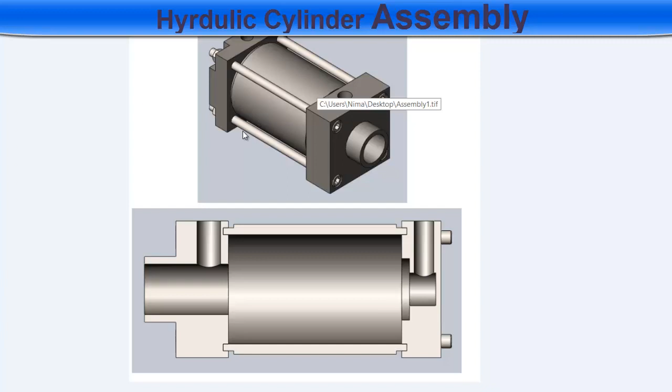In this video, I am going to design this hydraulic cylinder assembly. This is the L cap, this is the R cap, this is the cylinder, and there are 4 nuts and 4 bolts used to assemble it.

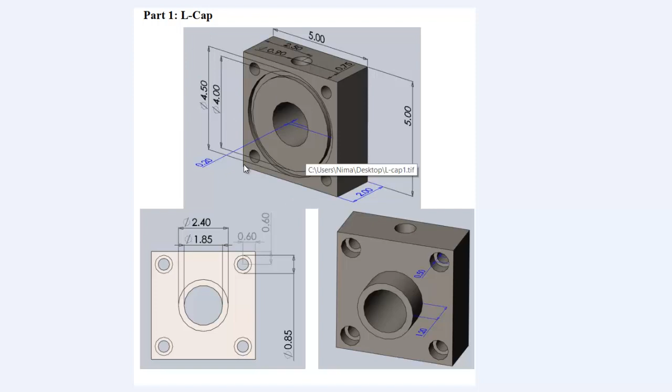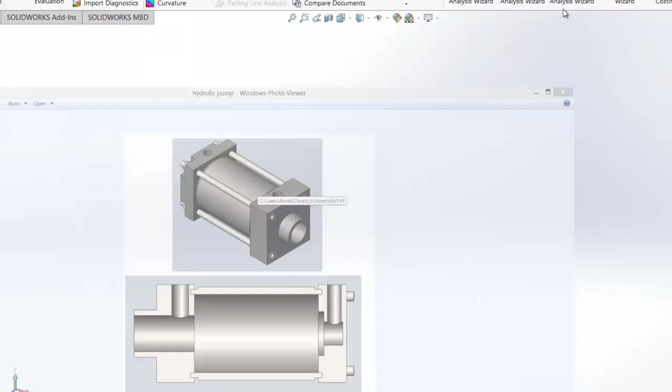The given units are in inches, so we need to verify that our working environment is selected as inches, so IPS, meaning units are in inches. First I am going to select the sketch tab, go to sketch, and open the sketch on the front plane for my base feature.

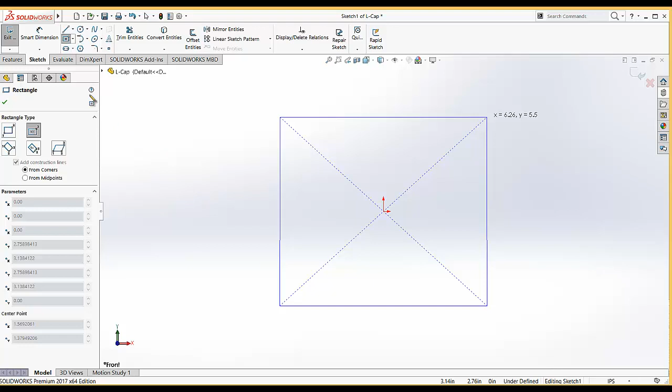I am going to select the rectangle tool, select the center rectangle, put the first point on the origin, drag it, and give the dimensions to this rectangle: 5 and 5. Then I'm going to exit the sketch, click on the feature tab, and extrude it. The depth of extrusion is 2 inches.

After that I am going to click on the sketch tab, start the sketch on this face, the front face of the model. Select this face and go to normal to.

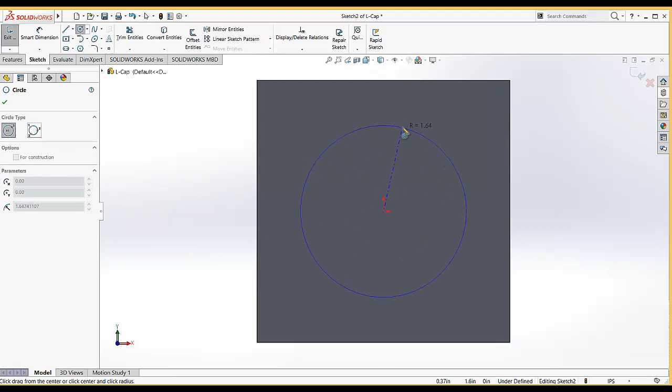Then I'm going to draw 2 circles, first circle and second circle. Make sure they are concentric. If they are not concentric, add a concentric relation and select dimension. The dimension of the bigger circle is 4.5, and the dimension of the smaller circle is 4.

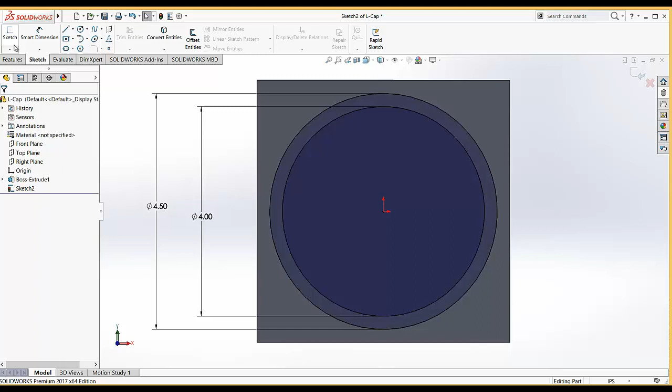The sketch is fully defined, so exit the sketch, go to the feature tab and select cut extrude because we want to make a cut, and go to isometric view. For the depth of this cut, we want a 0.2 inch cut. Click OK, and the cut is made.

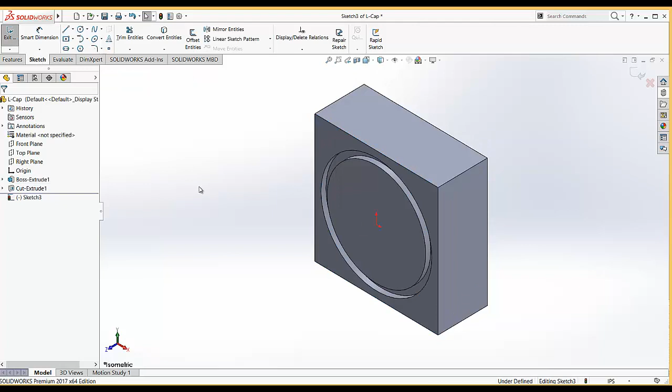Now I'm going to draw four holes in this face. I'm going to select this face, go to sketch and start sketching. Select circle, just draw one circle and then dimension it, and also draw the positioning dimension of this circle.

So I'm going to select this. This is given as 0.6, and from the center point to this line the vertical positioning dimension is 0.6, and the diameter of this circle is given as 0.5.

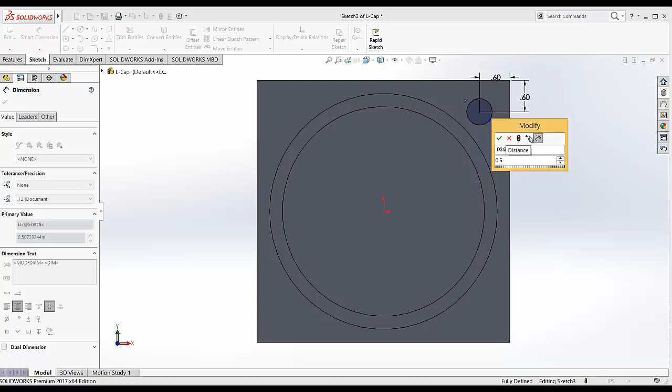Then I am going to draw 2 center lines, starting from here, again a center line starting from this point, 2 center lines starting from the center, one horizontal and one vertical. Now I am going to mirror it.

I'm going to select the entity to mirror, select this circle, and for mirror about I am going to select this reference line. Click OK. Then I am going to select mirror again, and for entities to mirror I am going to select this circle, select this circle.

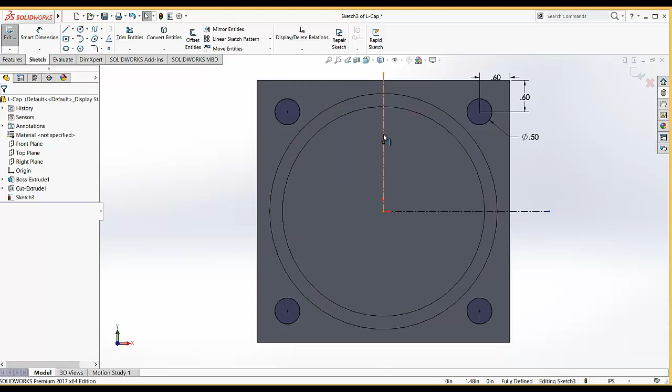When I drew this line, by mistake I did not make it a vertical line, so I added the relation by selecting this line and selecting vertical to add the vertical relation. That was my mistake. So the four circles are drawn. Go to exit sketch, make it isometric.

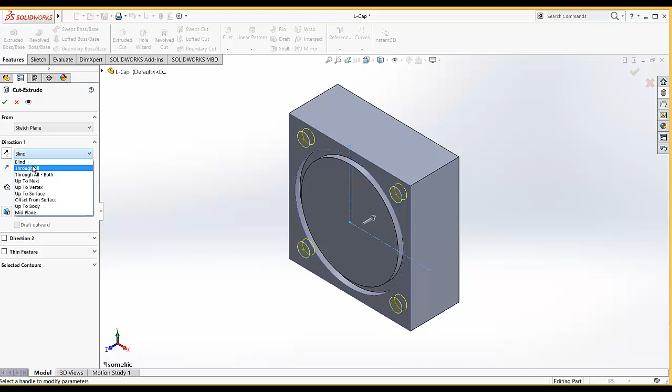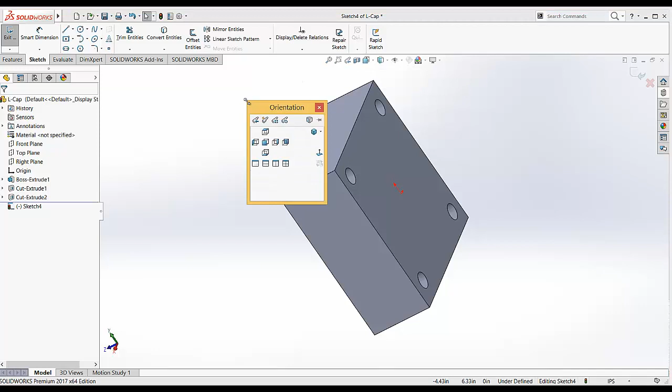Then go to extruded cut and under direction make the cut extrude type through all. Now I'm going to press and hold my middle mouse button and rotate the model because I wanted my sketch on this face. So I rotated the model, go to sketch and click on this face, then make it normal to. We can also select this view orientation by pressing the space button on our keyboard and selecting normal to.

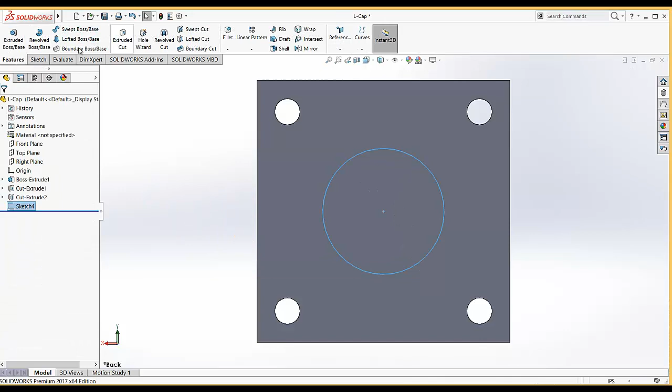Now I'm going to add a circle here and the dimension of this circle is given as 2.4. Then exit the sketch, select extruded boss, and for the extrusion make sure the direction is correct.

We don't want it in that direction, we need it in the reverse direction. So I am going to select this, and under the depth, the length of this extrusion, we need 1.2 inches.

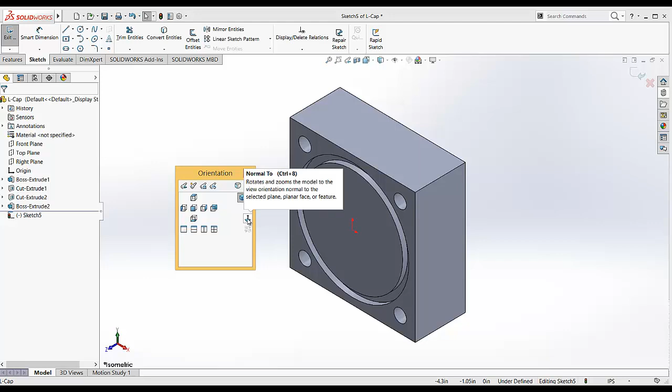Now I am going to select this sketch and again make the sketch on this face. So I am going to select this face, press the space button on your keyboard and click normal to, or you can also do it by going here.

And this is 1.85, we are going to make a cut. Then go to feature, extruded cut, make sure this sketch is selected, and select the type of cut extrude feature as through all. Press the middle mouse button and you can see the hole is done.

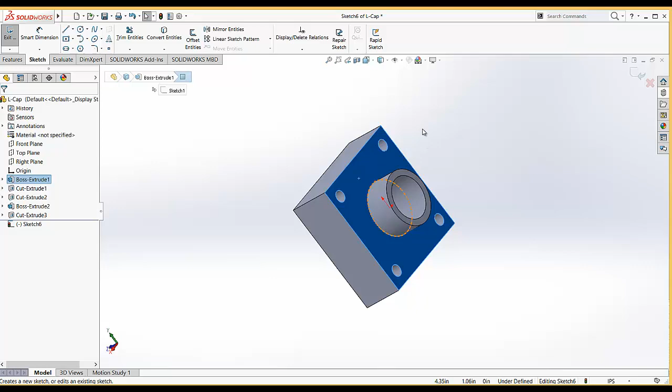Now I am going to press the middle mouse button and open my sketch on this face. Go to this face and click sketch, or you can also click on this face directly. When you click on this face, a window will appear and you select sketch. It will open a sketch on this face, then go to normal to.

I am making this tutorial for beginners, that's why I am explaining everything. If you have good practice with SolidWorks, you basically know a lot of shortcuts and how many ways we can do different things.

Select the circle, and when selected, the cursor converts into a pencil. Near the pencil you will see a small circle, meaning the circle command is activated. Move your cursor onto the center point of a circle, and the center point will automatically activate and show in the sketch. For example, if I move my cursor to this circle, its center point will be activated, and if I go to the edge of the circle, the center point will also activate like that.

I am going to move my cursor onto this circular hole, the center will be activated, and I am going to select this center point for the center of my new circle and place it here. Now the relation is automatically added. This new circle has the same center point as this circle, meaning these two circles are concentric.

I am going to select dimensions, go to sketch, and this dimension is given as 0.85 inch. Same way I needed these circles here and here, so I am going to add 3 circles, or we could mirror this, but I am going to add 3 circles.

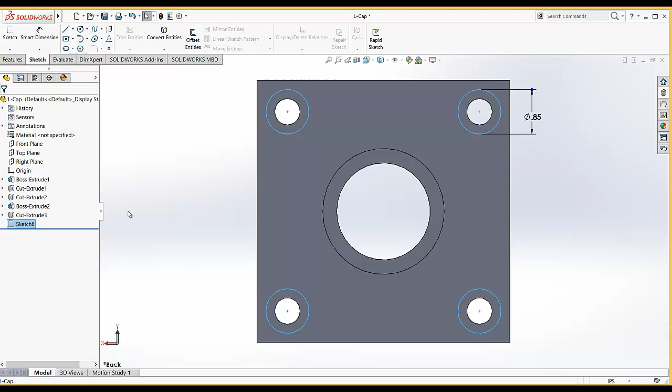So the sketch is fully defined. I am going to exit the sketch. Now I am going to make the cut. I am going to select this sketch, go to feature, extrude cut, and the depth of this cut is 0.5 inch.

Now only one feature is left, which is the cut on this top. So I am going to select sketch, open the sketch on the top face, press the space button on the keyboard, select normal to so the view is normal, and add a circle here. I am going to add the dimensions of this circle; the diameter is given as 0.9.

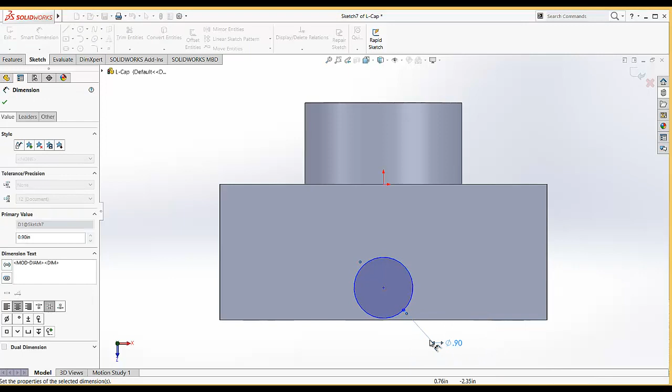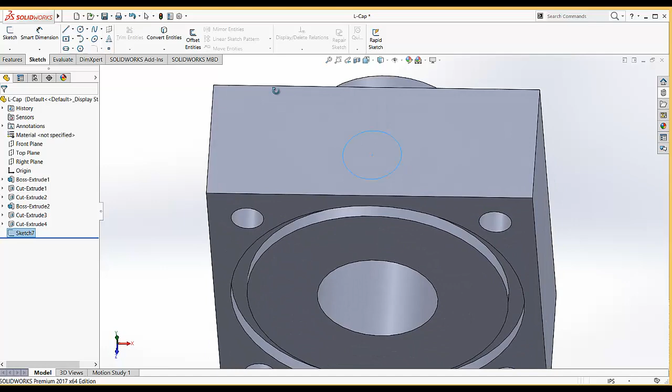For the position dimension, the distance from this point to this edge is 2.5, and the distance from this center to this is given as 0.75. Then exit the sketch, rotate the model, and make the isometric view.

Go to the feature tab and extrude cut. Under Direction 1, under the type of extrusion, we need to choose the end condition. Go to this arrow and open all the types of end conditions available. Our required end condition is up to the surface.

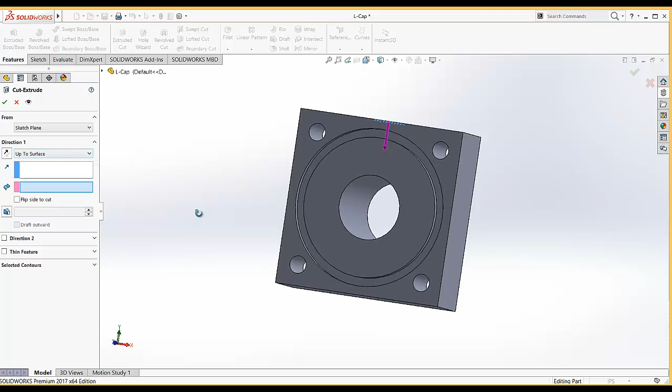To add up to surface, I need to select a surface for reference, so that this cut extrusion will touch that surface, like SolidWorks will measure the length of the cut feature. I am going to select this surface, and SolidWorks calculates that the length or depth of this cut must be from this point to this surface.

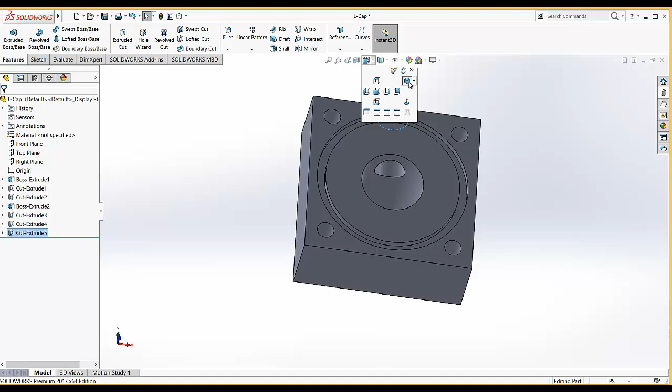If you hold the middle mouse button you can rotate the view, and you can see the cut goes till this surface. So our L cap is completed. I'm going to save it.

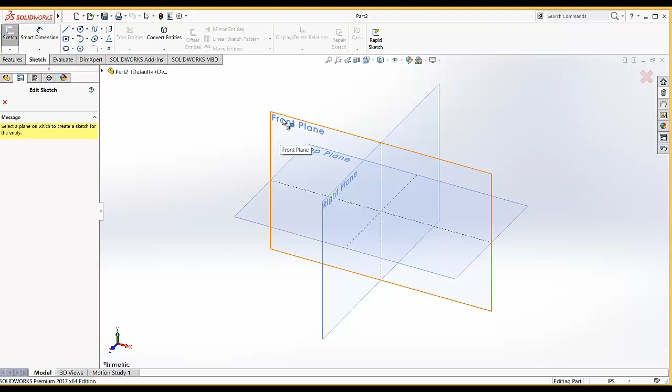Now I am going to start my new part, and draw the left cap. So go to sketch, and I'm going to open the base feature on this front plane. I am going to select the front plane for my base feature, open the sketch on this front plane, select the center rectangle tool, select this first point, and open the sketch.

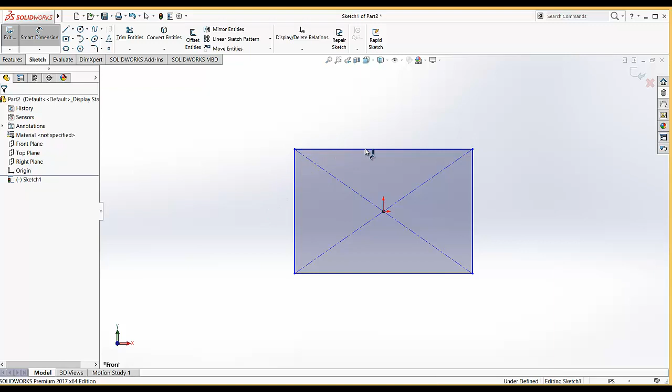Draw the rectangle, and this dimension is also the same - I am going to select 5 and 5. Then exit the sketch the same way and select extrude. This time the extrusion is 1.5, so I added 1.5.

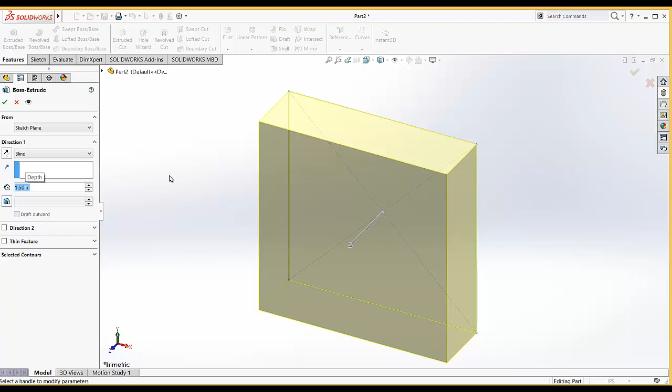Then I'm going to click OK, and click anywhere to deselect the sketch. Now I am going to draw the next feature. Select sketch, and for the plane of the sketch I am going to select this face, this front face, and go to normal view.

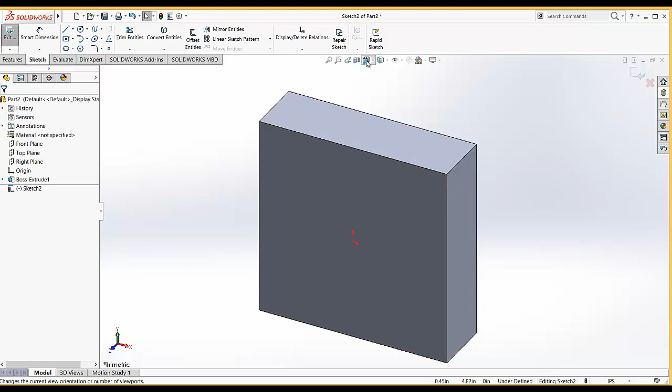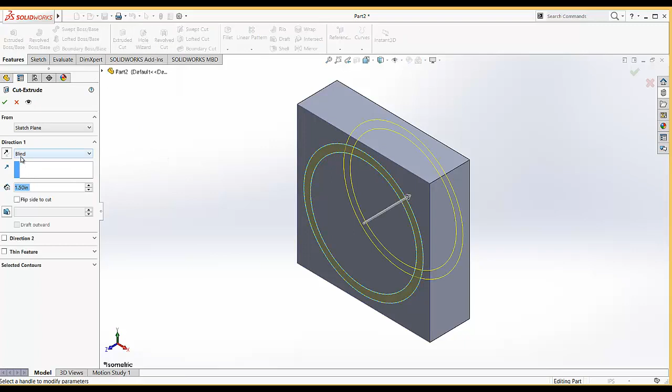Now I am going to draw a circle from here to here, and the diameter of this circle is given as 4.5, and the diameter of this other circle is given as 4. Exit the sketch, go to normal view, then open the extrude cut on this face. For the end condition, select blind, and the depth of this cut is 0.2.

Check OK. Now I am going to open the sketch on this face, press the space button, click normal to, and then select the circle.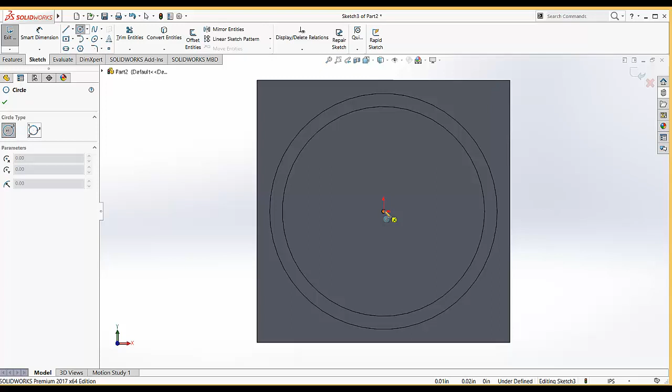Now I am going to add a circle of diameter 2.25 and click exit. Go to feature tab and select extruded cut, and for the depth of this cut, the depth is 0.3.

Click OK, and again I am going to select the sketch, and this time for the plane of my sketch I am going to select this surface, not this one, the inner surface of my design. Open the orientation and go to normal, select the circle tool and draw a circle.

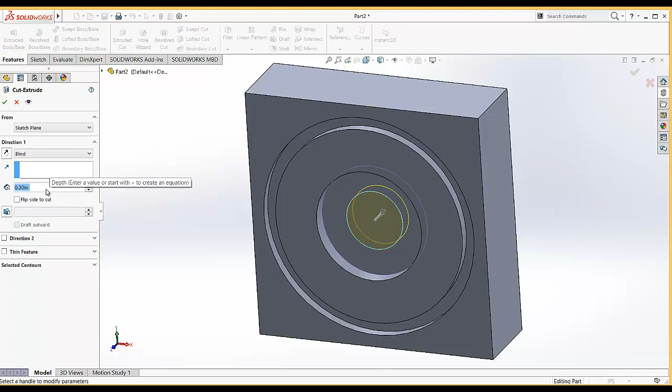The diameter of this circle is 1.2. Feature tab, extruded cut, and the depth of this cut is 1. Click OK.

Now I am going to add a hole on the top of this surface. So I am going to sketch, open the sketch on this surface, go to view orientation and normal to.

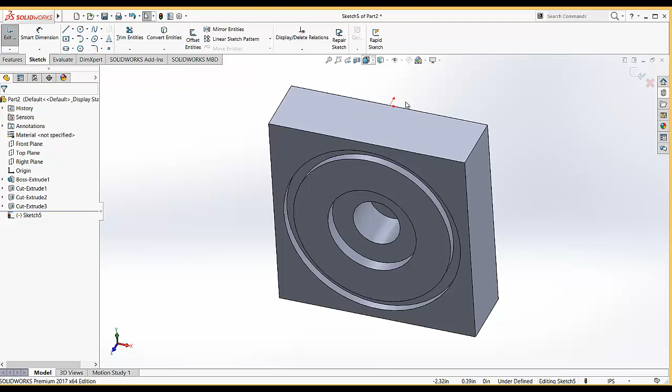I am going to select a circle, draw a circle, and then select the smart dimension tool, select this point and this line. The dimension of this is 2.5, and from this to this is 0.85, and the diameter of this circle is 0.75.

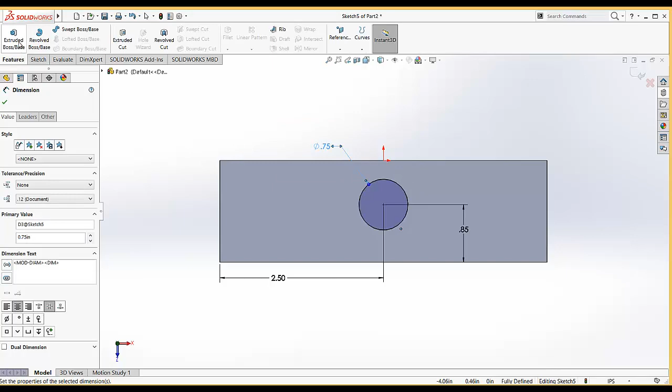Extruded cut. And again, under direction 1, the end condition type, I am going to open the dialog box of the end conditions, and I am going to select up to surface.

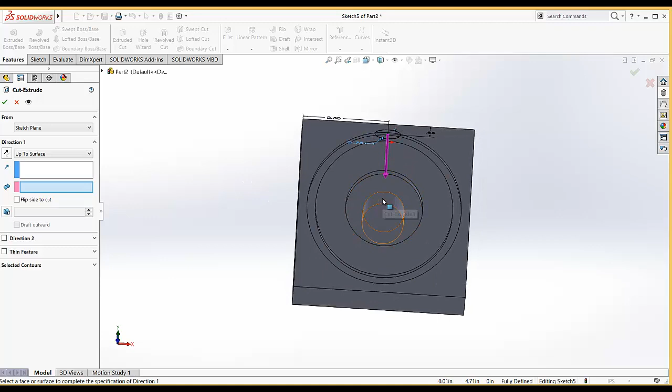This time we wanted our sketch to remove the material till this surface, so I am going to select this surface. If it is in that position, hold your middle mouse button and drag your mouse to rotate it to a suitable position, then select this surface. Now the cut will be till this surface.

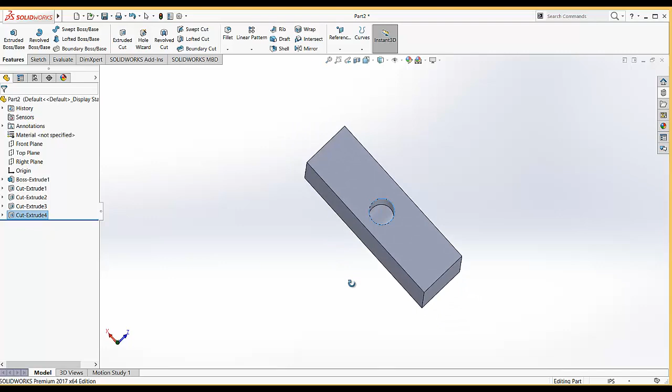Click OK. You can rotate your model and see the cut. Go to isometric. Now I am going to press my middle mouse button and rotate the model to see the back side of this model.

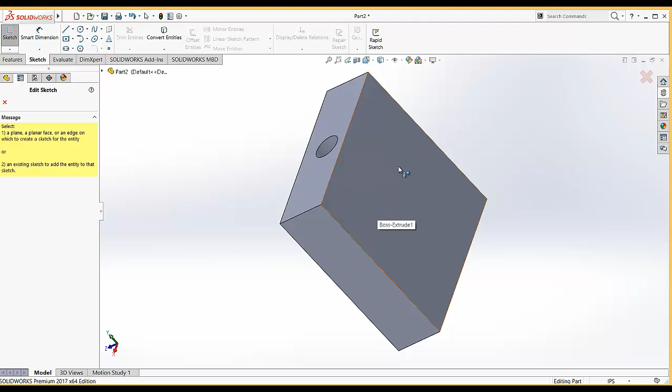So I am going to sketch, and open the sketch on this back side of the model. I am going to click on this surface and normal to. Now I am going to select a line tool.

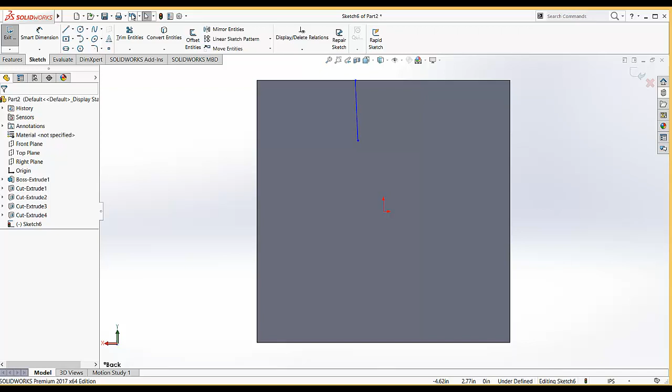I am going to draw a sketch like that. Sorry, I'm going to delete this whole sketch. Again select line, and I'm going to draw a line.

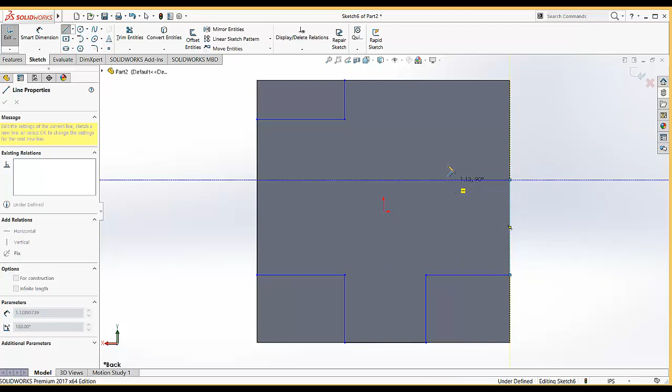So I randomly draw a sketch similar to this, similar to my requirement, like that. I draw a sketch like that, and now I am going to add some dimensions and relations to this sketch to make it similar to this sketch.

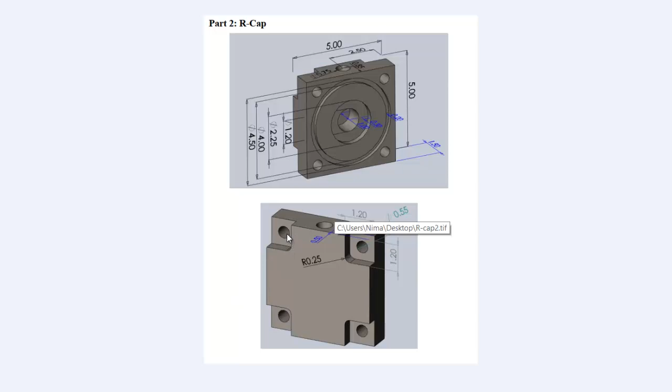To add the dimensions, we can do it either of two ways. Either select a line and another line by pressing control, and SolidWorks under the properties will show all the suitable relationships you can add between these two lines, or you can go to display and select add relation. So under this add relation, I want this point and this point vertical.

These 2 points must be, sorry, horizontal. These 2 points must be facing each other, like they are on a horizontal line. So I am going to click horizontal and press OK, unselect these 2 points, again go to this and add a relation between this point and this point.

Horizontal, click OK. Again go to add relation, and this time select this point and make them vertical. So these 2 points are facing each other and they are on a vertical line. Select this point and make them vertical, like that.

Now I am going to dimension it. So distance from this to this edge is given as 1.2, and distance from this edge to this edge is given as 1.2.

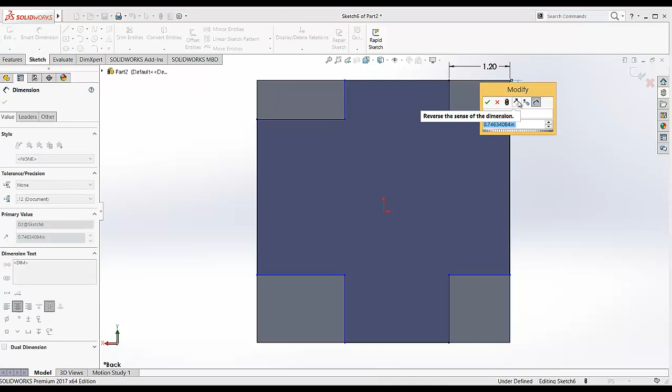And from this to this is 1.2, from this to this is given as, okay, from this to this is given as 1.2, and it's fully defined. By defining these 1 2 3 4 dimensions, it is fully defined.

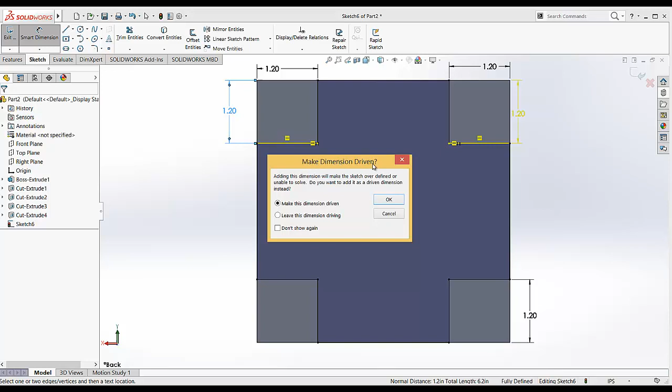If we add more dimensions like this, if we try to add one on this side, it will over define our sketch. This passage tells that to make dimension driven, we are over defining the dimensions, we don't need any more dimensions. So click OK, go to exit this sketch, and now I am going to extrude this sketch.

Middle mouse button and rotate it, and the depth of this extrusion is 0.5. Now I am going to add the fillet.

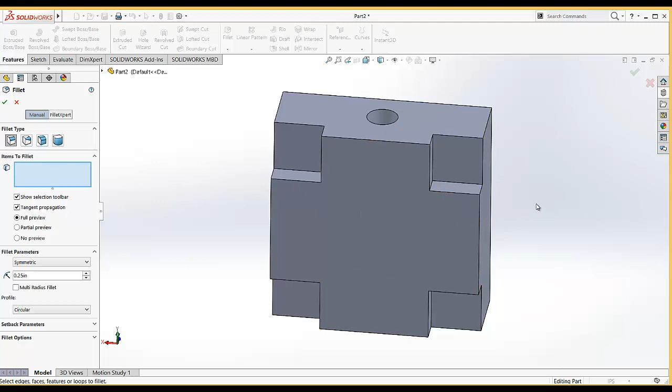So select fillet, and the radius of the fillet is given as 0.25. I am going to select the edges where I wanted to place the fillet. So I am going to rotate the model by pressing the middle mouse button.

I am going to select this edge. If this preview is not selected, make this full preview checked, because it will show you the preview of the fillet.

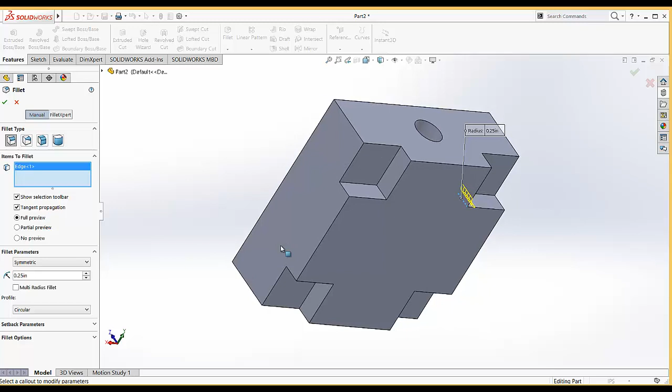So again middle mouse button and rotate to a suitable position and select this one. Again middle mouse button, keep holding it and drag your mouse and select this, and again middle mouse button, drag it to a suitable position, select this and check OK.

So now the holes on this surface are left. I am going to select sketch, start the sketch on this surface, press the space button and normal to, and draw a circle here.

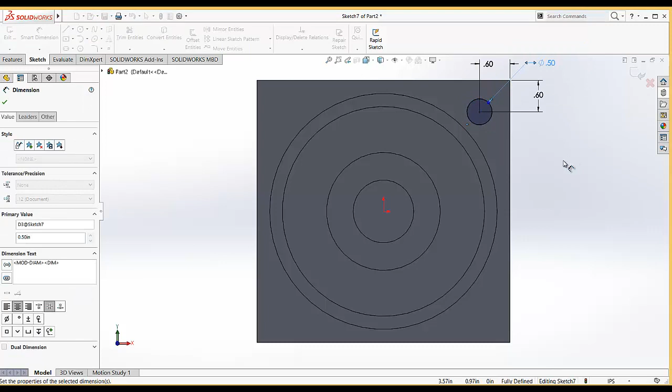From here to here this is given as 0.6, and from here to here is also 0.6, and this is 0.5. Select the center line and draw two center lines starting from the origin, one horizontal and one vertical.

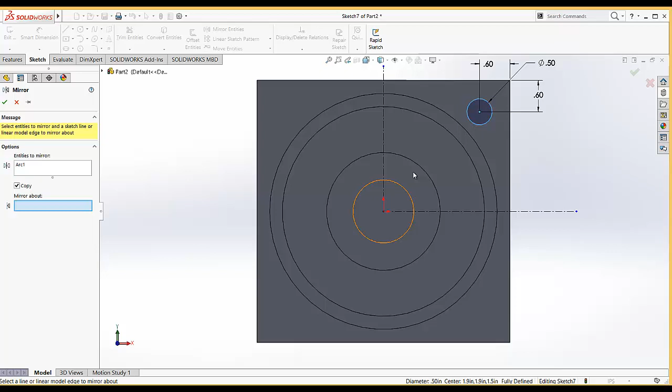Then go to mirror, select this circle, under mirror about select this line. Again under entities to mirror, select this circle, and under mirror about select this line, then click OK.

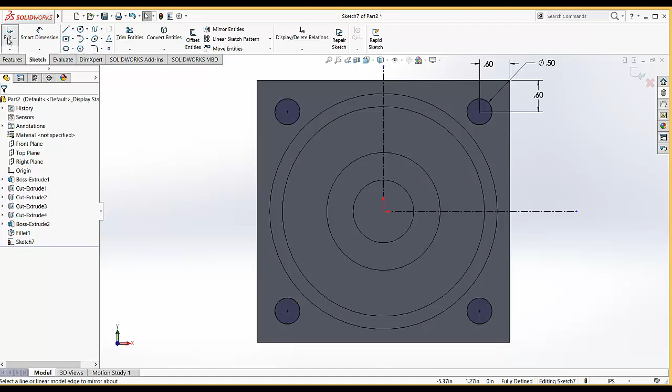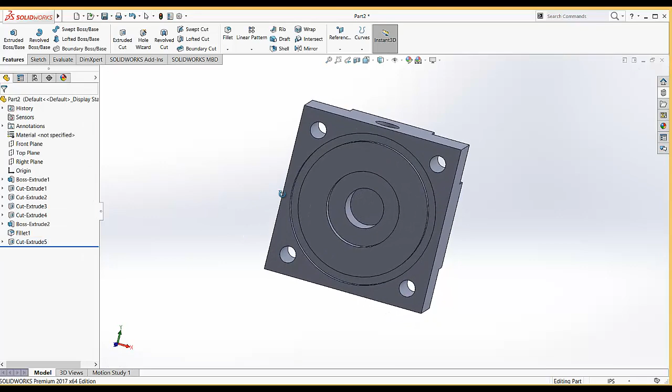Check that the sketch is fully defined, meaning we don't need any dimension, and click exit. Now go to the feature tab and add the cut. Make it under direction 1, and for end condition type, make it through all. Create the model and check. The model is done. Go to save and okay.

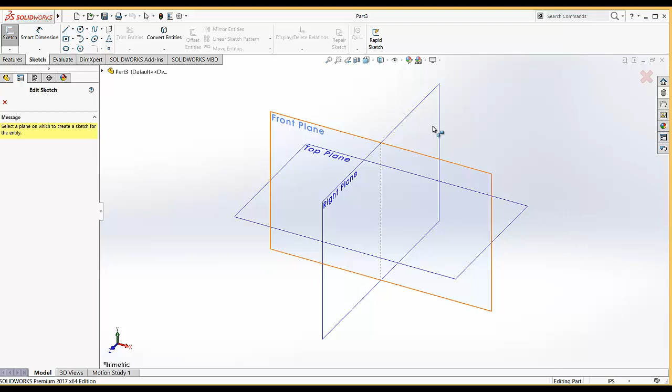Go to new part, units inches are already selected. Go to sketch and select the right plane for our sketch, then go to circle and draw two circles.

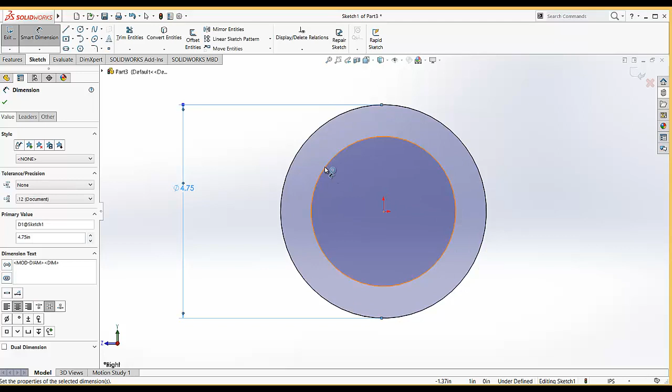The dimension of this circle is 4.75, and the dimension of this circle is 4.

Exit the sketch, go to isometric view, select the feature tab, and select the base boss extrude command. The total depth of this cylinder is 7.

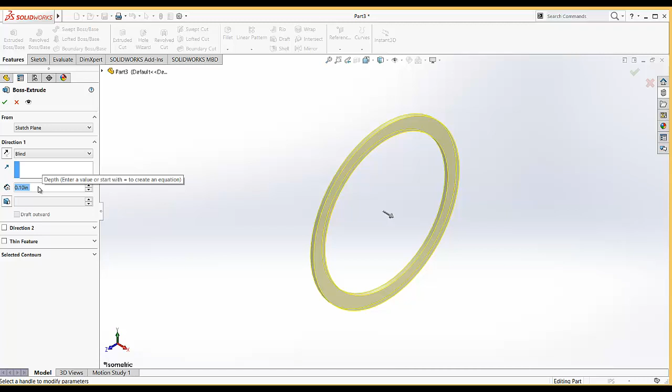Now you see the extrusion is in that direction, so go under direction 1, under end conditions. Now the end condition is blind. Click here and select the mid plane end condition.

By selecting the mid plane end condition, our sketch will be extruded on both sides of the plane. You are able to see this sketch. So by selecting mid plane, our sketch is extruded in that direction, half meaning 3.5 in that direction and half in the opposite direction of our sketch plane. Hope you understand the mid plane end condition.

There is a benefit to selecting this mid plane end condition according to our design. In this design, if we select this mid plane end condition, it will save our time.

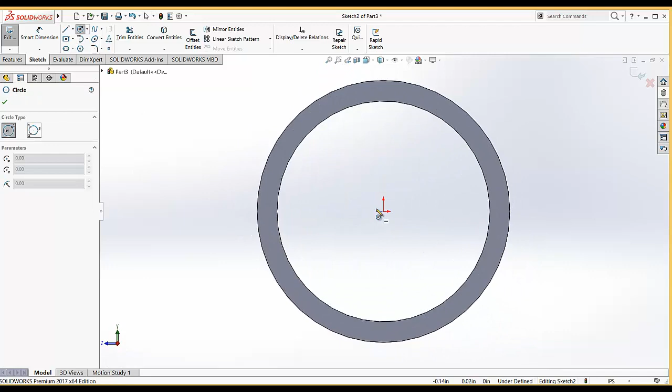You will see it. So I am going to select sketch, start the sketch on this face, and click normal to. Now I am going to add a circle from here to here and click smart dimensions; this dimension is 4.5.

Now we need to add another circle, so I go to circle and add a circle like that and dimension it. This dimension is 4.7. This circle is the same dimensional circle which we already added in our base feature, in our first sketch.

So one way of adding this circle is to select the circle and add it again, but that will take some time. The other method is that I'm going to delete this circle. Go to delete, and the circle is now deleted.

Because we need this edge in our sketch, we can either add it by drawing a circle again and dimensioning it, or we just go to convert entities. What does this command do? It will convert the edges into our present sketch. So I am going to click on convert entities.

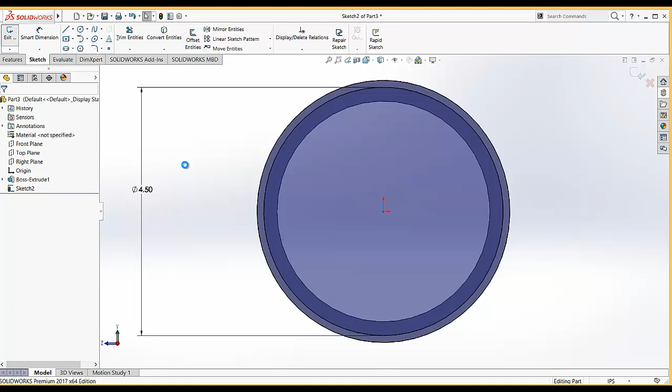Under convert entities to convert, I am going to select this edge, so this edge will be converted into our sketch. Now it's converted. Go to exit the command, and you see the sketch is drawn as a feature, and extrude a cut.

The depth of this extruded cut is 0.4, and we need the same cut in the other direction. This cut is needed on the other side, so we can do that by using the mirror. You must know about the mirror command.

Like in our previous two designs, we used mirror in the sketches. In features, the mirror command works the same way, but here we need to select the features. So I am going to click on feature, and this pop-up window appears.

The first thing it's asking about is the mirror face or plane, a reference face or a plane. So we need to select a plane. But as you remember, we made this cylinder by selecting the mid plane, so our half sketch is extruded one way and half the other way. That's why our planes are shifted to the middle of this cylinder.

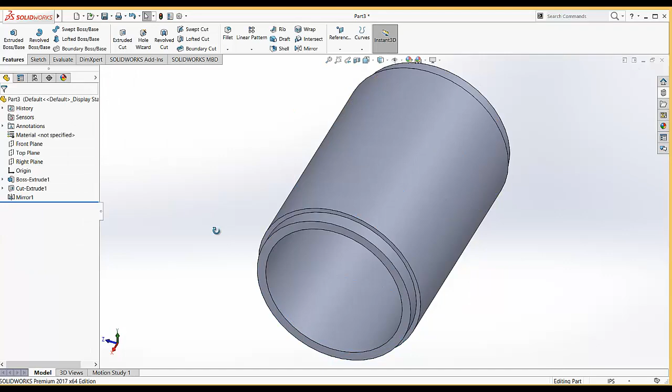If you go to the right plane, you see it's rotated and shifted in the middle. So under mirror, select the right plane, and for features to mirror, select the cut extruded feature. This feature will be mirrored with reference to the right plane and shifted to the other end. Click OK, now the cylinder is completed, and I am going to save it.

So I close this and go to new part. Under part, sorry, we are going to assemble it now. So go to new and click assembly, then OK.

Let me close this. So you know the concept of assembly. In assembly, we are going to join different models we created previously, add them, and add some constraints or relations between them to make a working assembly.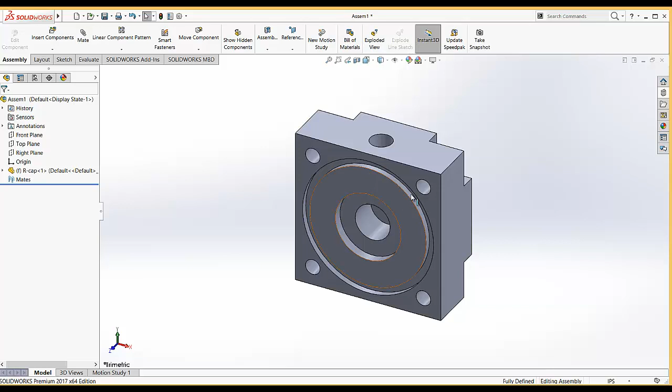So I am going to select Insert. Under Insert, when you click it, this window appears asking about open documents, browse. So I am going to open the right cap, place it here in the window, and make it isometric.

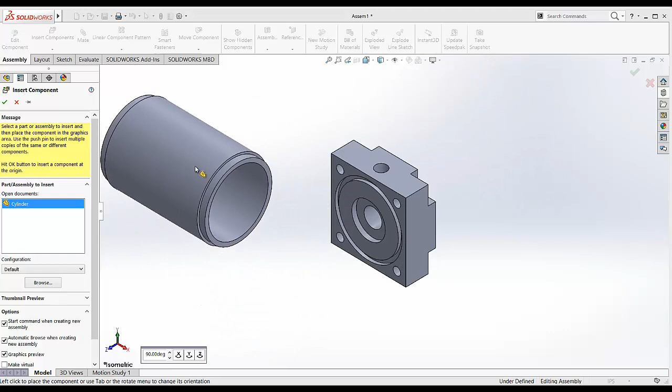Then I click on Insert Components and select the cylinder. The cylinder will appear and attach to the cursor. As we move our cursor, this cylinder will also move. So just click anywhere and it will place the cylinder. Cylinder is placed now, and now I am going to add the mates.

By clicking on Mates, we add relations or constraints. These are the standard mates, types like coincident, parallel, perpendicular, tangent, concentric, lock, dimension, angle. The concept of these mates is the same as the relations we use in sketches - vertical, coincident, parallel, perpendicular, tangent, concentric - but the function of these constraints is different because they join the models. Under mate selection, it asks for the selection.

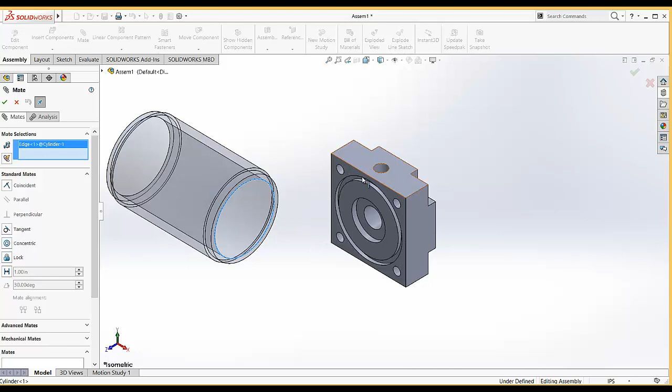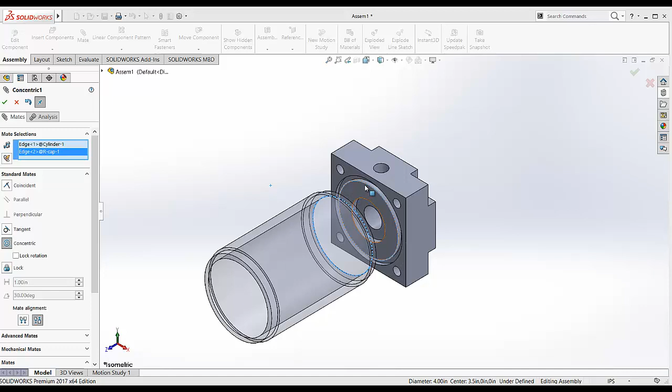So I click on this box, and for mates I select this edge and the edge of this circle. Some mates are picked automatically, like coincident, but we don't need coincident for this mate type - we need concentric. So the concentric mate is added, meaning the edge of this circle and the edge of this other circle are sharing a common center point. Click OK.

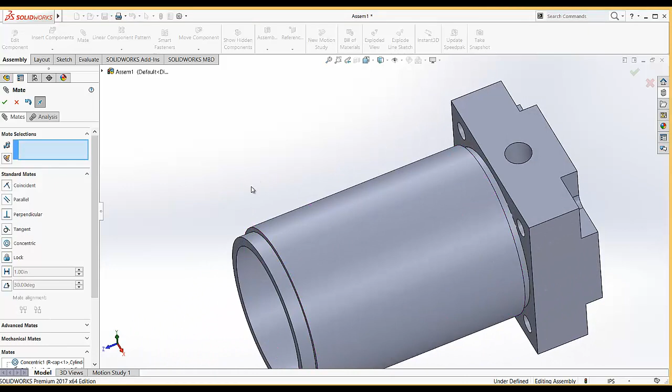Now let me move it here. We want this surface and this surface to be coincident, so I select this surface. Now the surfaces are coincident with each other, and click OK.

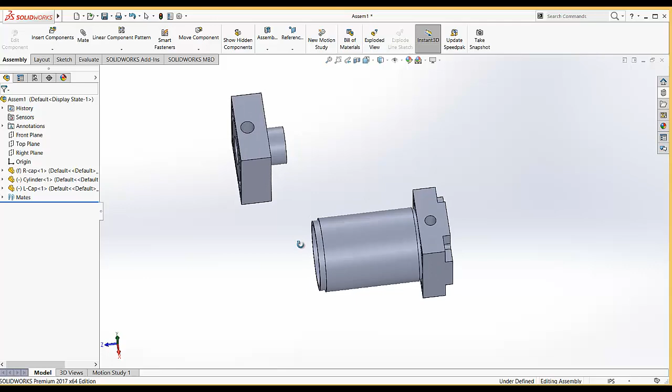Now I click on Insert Component and select the left cap, and place it here. Now press the middle button to rotate the model so you can see the different faces or the location you want.

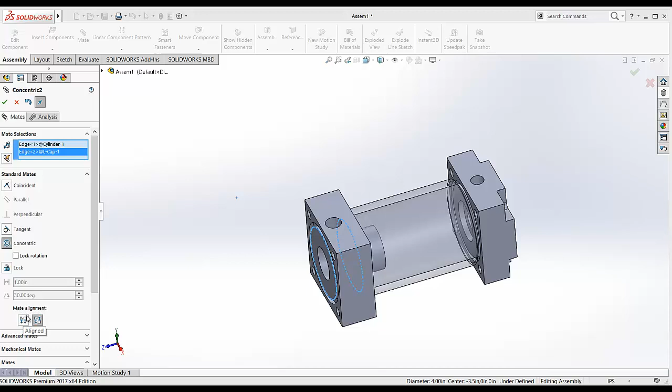So again I click Mate, rotated, and I select this edge and this edge, and the relation I want between them is concentric, so I click concentric. But the position of this model is not right relative to the cylinder, so we go to Mate Alignment, and under these two options I select this line and it changes its direction. Click OK, then I click my left mouse button and drag it here.

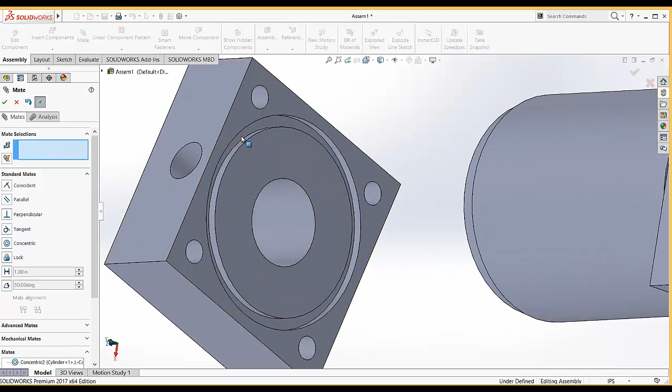Under mate selection I select this surface - select it carefully, you can zoom in and then select it. Again this mate is added, but now the position of these two models is not good - you can rotate it, but to fix it I select this surface and this surface and make them parallel.

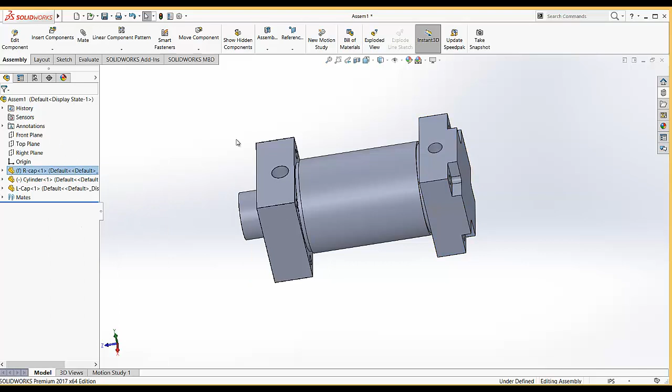So if you rotate, you are not able to rotate this model because it's fixed at the origin. Let's go and make it - actually it's not fixed at the origin or anywhere, so I am going to make it fixed and then isolate it. You see these two models will disappear, so exit isolate.

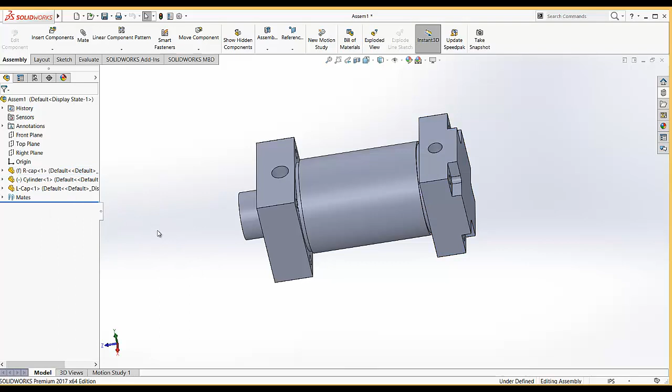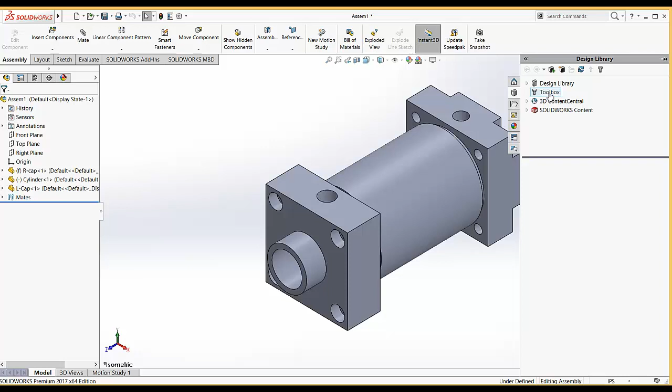This assembly is done. Now we are going to add four nuts and four bolts. You can also design four nuts and four bolts yourself, or you can find these already designed in the toolbox. You can place them in this environment and then add the relations between them.